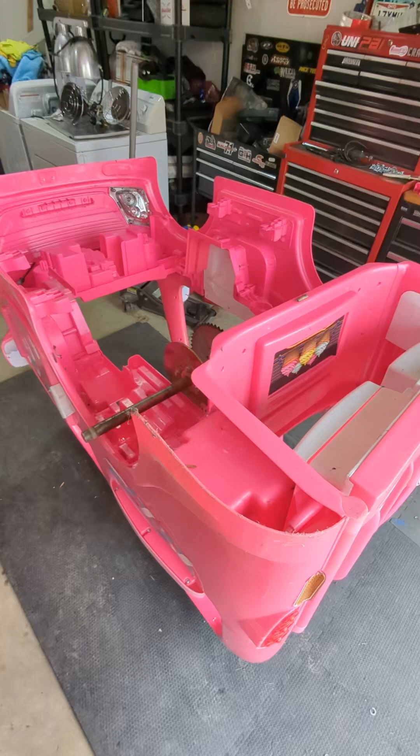So now that I have this thing flipped over, we'll start laying out the base frame, which is just the base box that'll make up the frame.

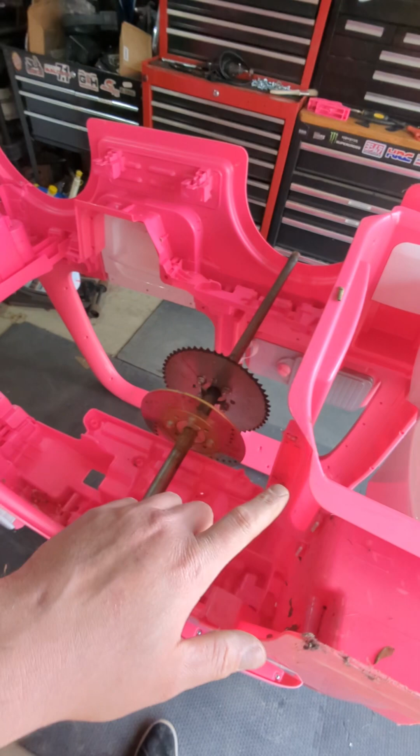So on this one, it's a little weird because your frame's actually going to sit in here. These are old mount points, so I'll probably use those to mount to the frame. I'll come out, box it down here. You have these mounts here.

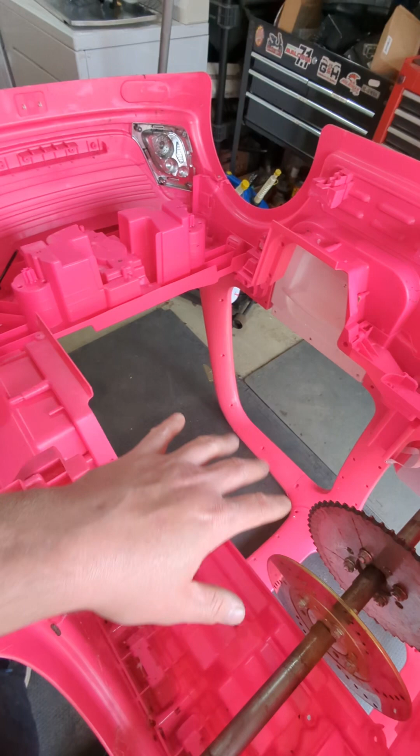They're actually the original ones that mounted the whole midsection of the car. They're nice and convenient, so I'll probably run the frame rail right along these on both sides. So that'll be your three sides.

And then somewhere around this point, you gotta jog in because you need room for your wheels to turn. I made that mistake on the first one, had to chop it up and redo it.

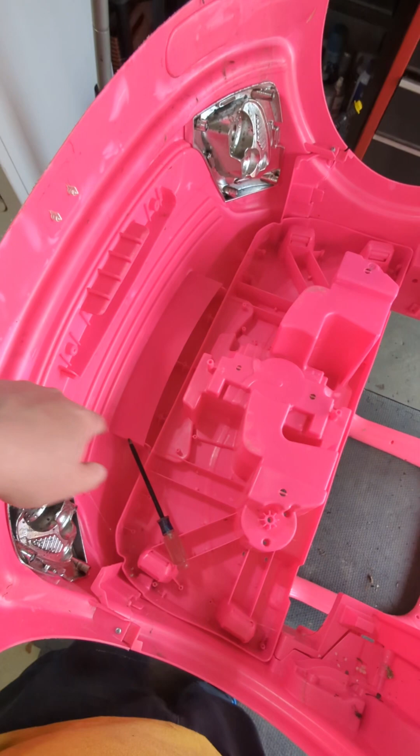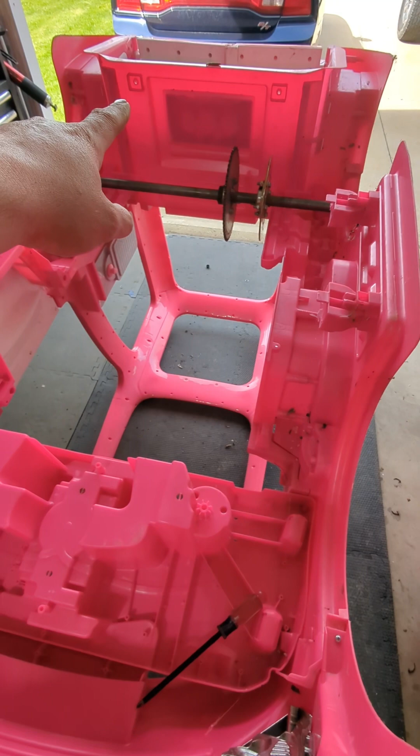So yeah, you'll jog in, and I'll probably come straight through here, and same thing over there, jog over and back. So I'll tie in there to mount the body, and I got that mount there and that mount there on the back.

So after doing a little measuring, I drew up a quick sketch of what the base frame will be. These measurements could change a little bit. I will cut all this stuff, tack weld it all together, and fit it in here.

If it needs changed at all, I cut it apart, trim stuff, whatever. But this is the rough measurements I have. This will be the rough shape.

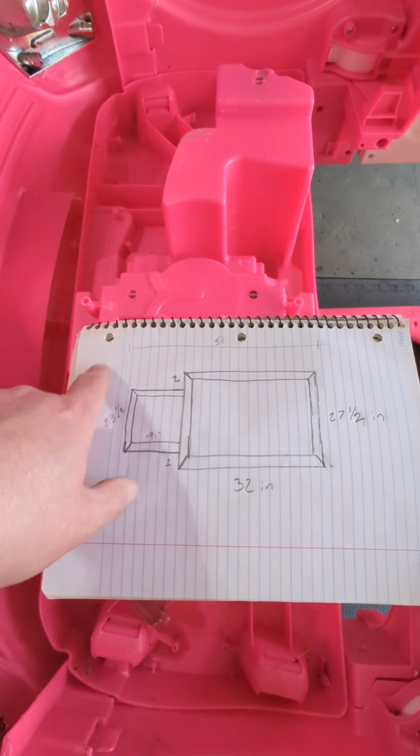This is the front of the frame. You got to jog in because your front wheels and axle will be here, and you got to have room to turn the tire without smacking the frame. So this is just a base.

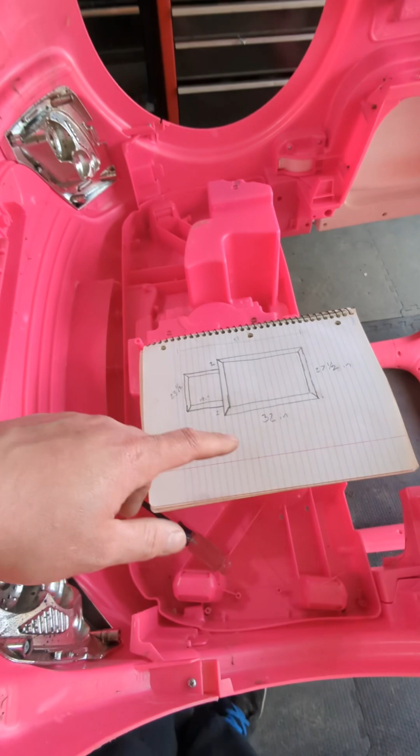This is how I set all my frames up, basically. Same idea, Mustang frames the same, every one of them that I've built. This is just kind of my starting point, and then I'll work from there, lay out the rear axle, the front axle, all that stuff.

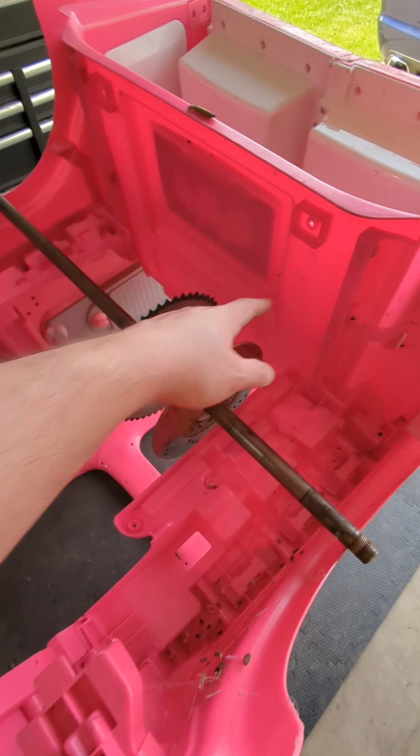But as you can see, 27.5 inches, that's from the inside here to the inside of that one. We got 32 inches here, that's from this point to right around here, the back side of your wheel well.

And you have that 2-inch jog. You'll come up, crossed.

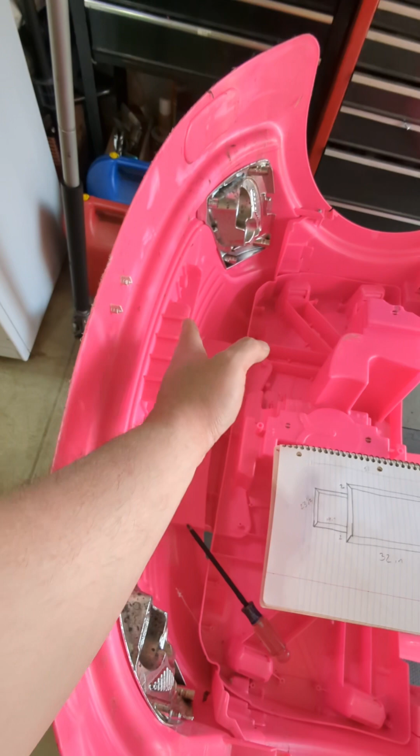You have 19 inches here. That'll be from this cross member here at the back of your wheel wells forward. I have it set right to this point, right at this mount.

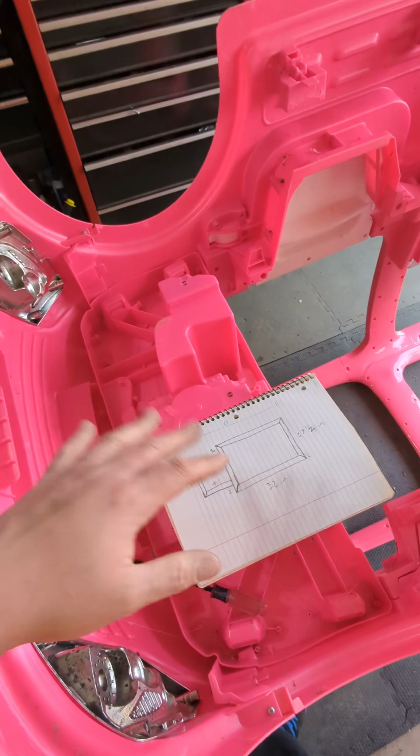So I'll put something here to mount the body. And then over, same thing on that side. So that's the base layout of the frame.

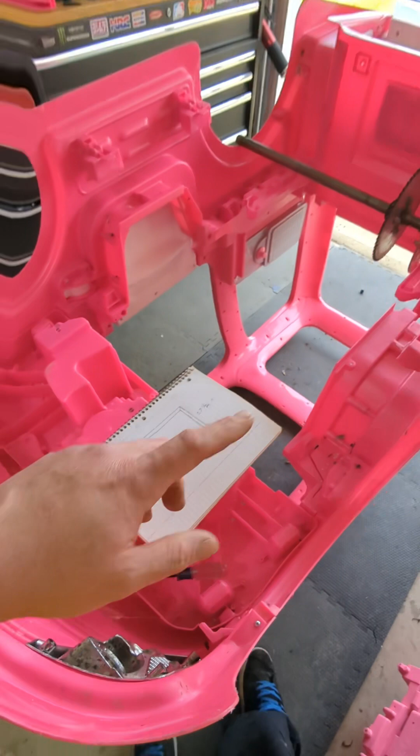I'm gonna cut, tack all that once it's fit together. I'll make any changes on this print and I'll show you guys. But that's how I lay my base frame out, and we'll go from there.

So I got the basic frame all cut. As you can see, it's kind of roughly laid out. I might actually have to bring those sides in a little more. We'll see once I get it into the body.

I'm gonna tack weld it all together and see how the turning radius and stuff is with it, to make sure it don't hit the frame. But gotta get it thrown up on the weld table, get it all squared up and tacked together, and see how it fits in the body.

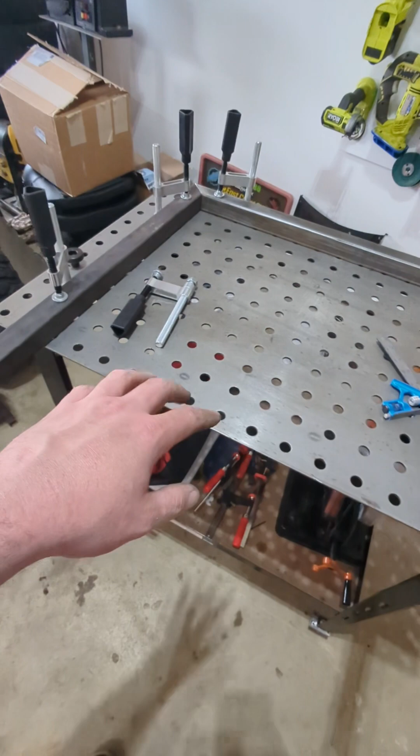Got part of the frame here clamped up to the table. As you can see, these clamps are really nice. They drop down through the holes and just got a nut on the bottom. I just finger tighten them, clamp down, and then you got these little alignment pins that go in. That gives you a nice little corner to start with.

I'm gonna check your corners, check them for square, both sides. And then I also measure outside to outside to make sure everything's parallel, square, good to go. I'm gonna tack this up, move it back, put the front bar on, and then start working on the front section of the frame.

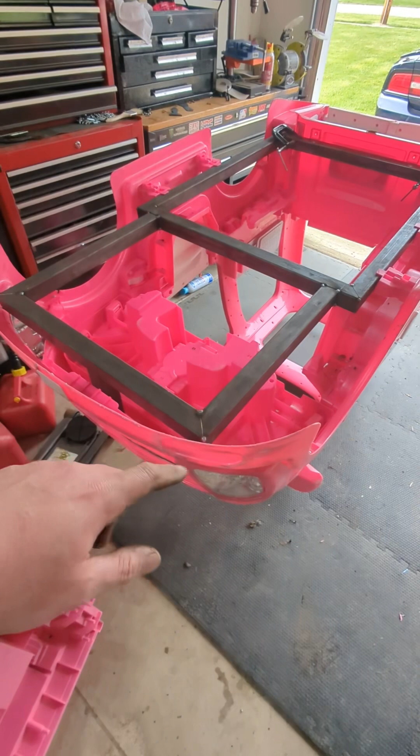So I got the base frame fitted into the body here. I do have to squeeze this down some, I don't have enough room for the tires. So I have to cut here and here, cut this off, cut a little off, squeeze it down skinnier, and redo it.

So this is the base frame. I just have that kind of sitting there for now to hold it up. But as you can see, it sits right in here on both sides.

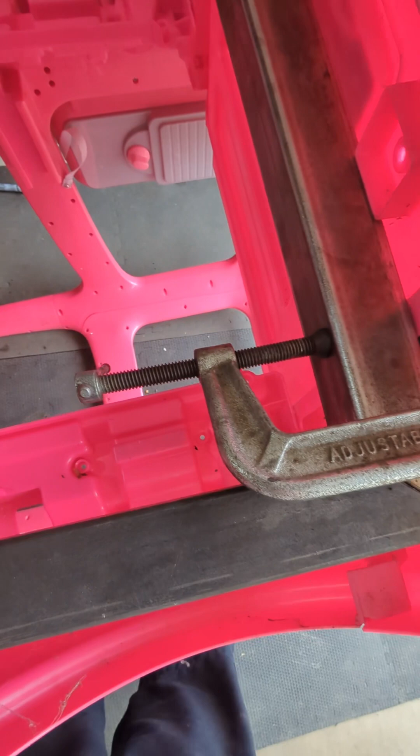And I'm actually below this mount back here, so I'll probably make something that comes off and in here to use these holes. So I got to figure that out, but that's the base frame.

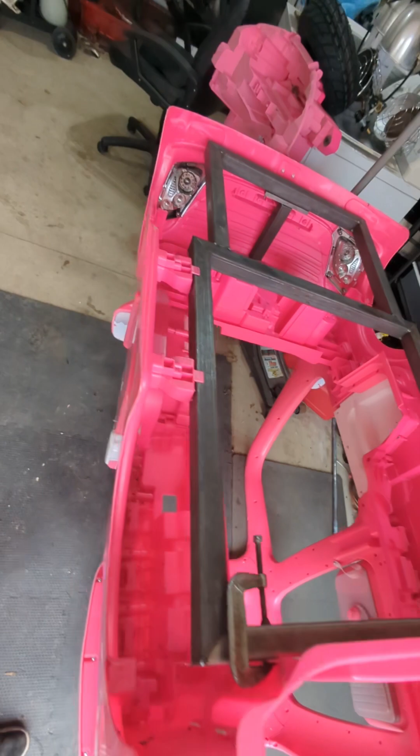This is how I start all my builds. Gives you a good platform to work off of and build from.

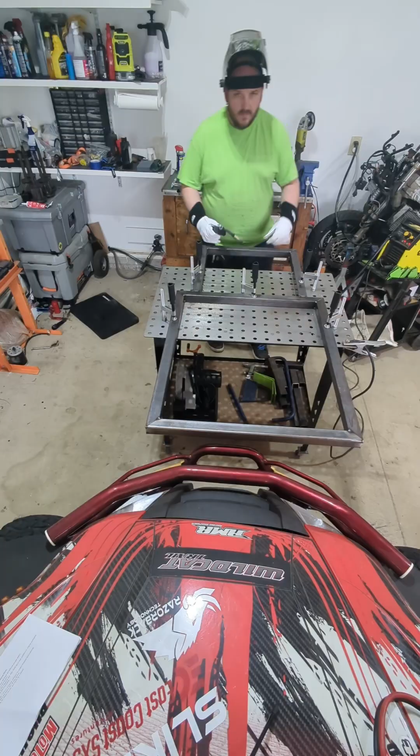So the base frame is all finished and laid out. Time to weld it in.

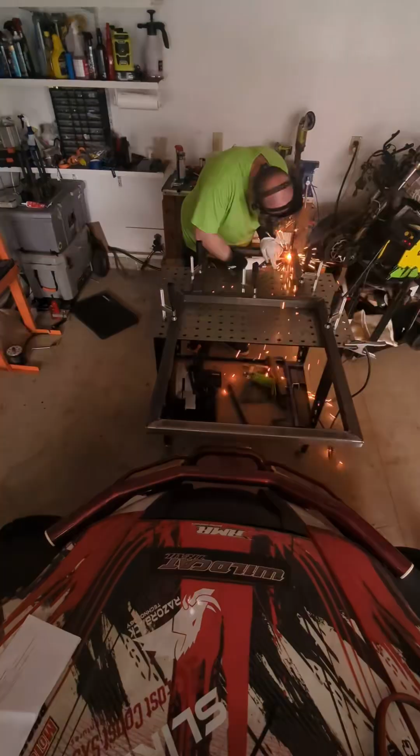And that's how you blow the breaker out in your garage.

So I got the breaker reset. That happens from time to time when I do it on welding. Unfortunately, that's the downfall of welding on 110, but it's what I got. So I'll reset it when I go, and keep going welding. Let's keep getting this thing welded in.

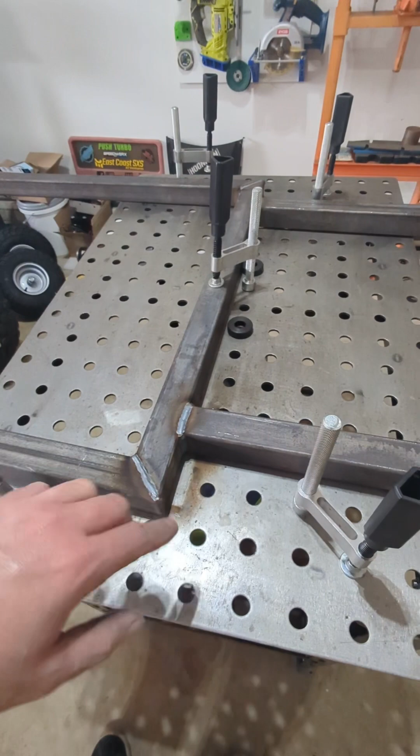So that's the next step. Get it all smoothed out and ready for adding some axles and bearings and stuff like that.

So here's the frame all welded out. I just finished grinding all the welds. As you see, I like to smooth my flat welds out and clean my corners up.

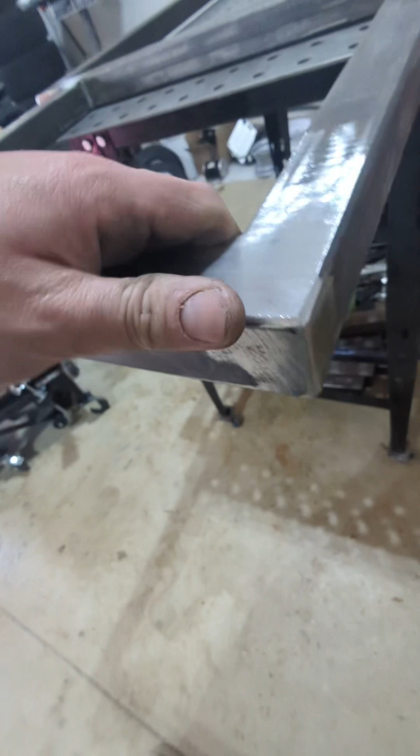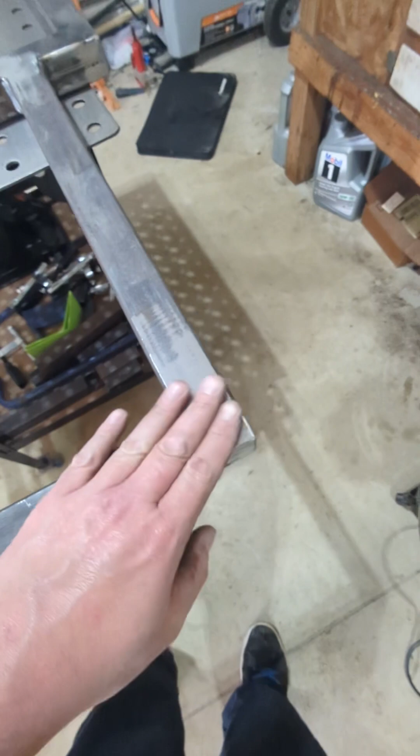And then this type of weld, these inner corners I always leave. I'll just clean them, hit them quick to knock any of the little weld BBs out so it's smooth. But that's the frame, the main frame.

Next, I'm gonna get this thing fitted into the body, put some body mounts on it. That's the next step that I like to do.

And then I'll fit my rear axle, get it sitting in the wheel well how I want it, width and everything set, and then I'll move to the front axle and get it set. So stay tuned, that'll be in the next video.